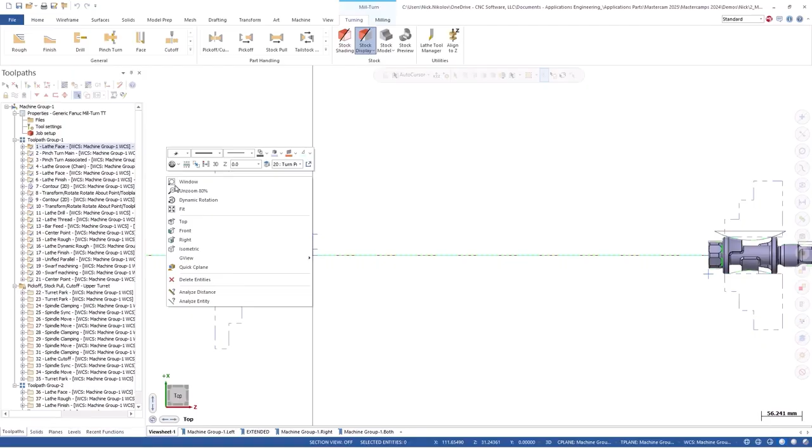Here we can see our fully programmed guide shaft signature part. We already spent a considerable amount of time importing and defining the work holding accurately for both the main and sub spindle. We also took the time to populate the upper and lower turrets in the Tool Setup Manager with all of our cutting tools and locators.

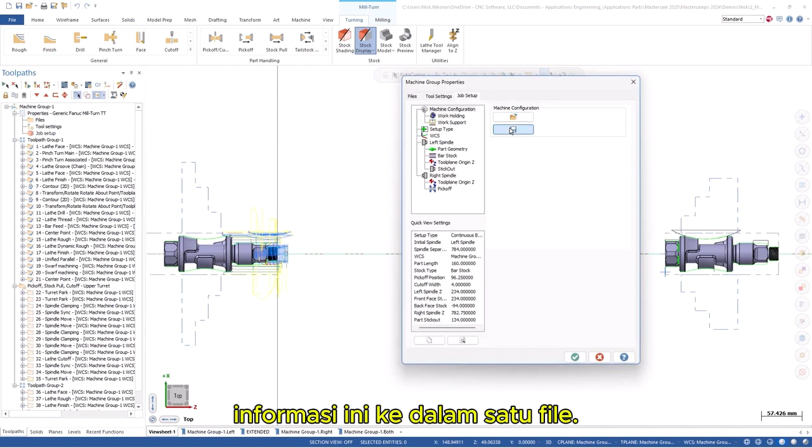Mastercam 2025 now allows us to quickly save out any of this information into one file. We will name the file Guide Shaft and save to our local drive. This file could also be saved to a server location so that multiple users could access it.

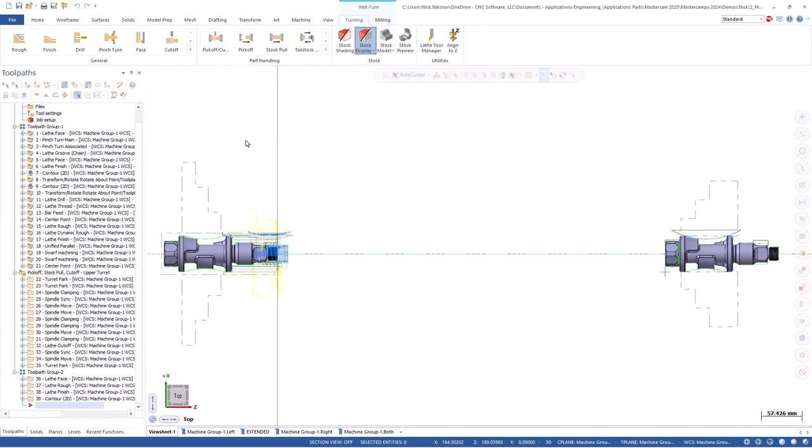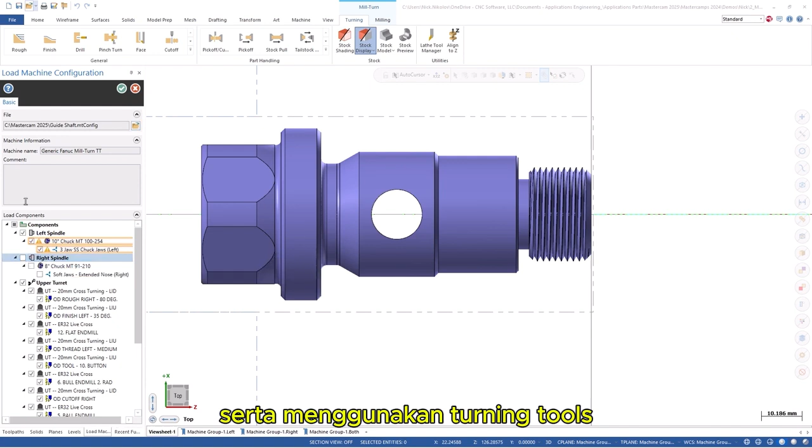We can just as easily load it into our next part file. The Load Machine Configuration button is in the same Machine Group Properties page. In this case, we know that we will be using the same chuck and chuck jaws on the main spindle, as well as using the turning tools on both the upper and lower turrets. We can always come back and add individual tools from this file if we end up needing them later.

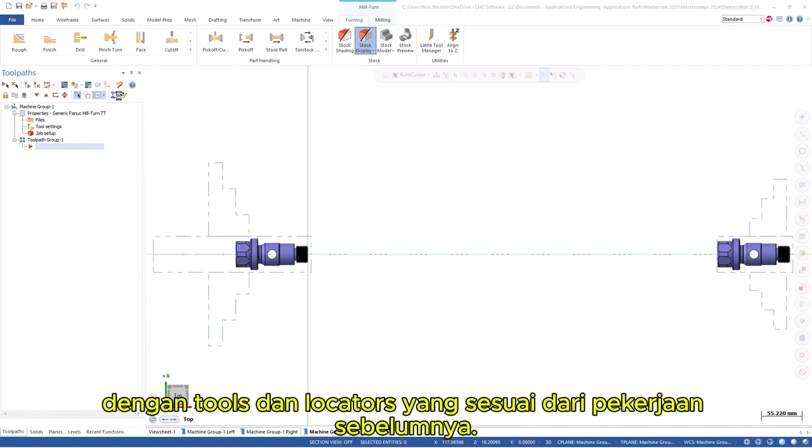We can see that the file has populated our Tool Setup Manager with the tools and locators in their corresponding locations from the previous job. Also, the tools themselves are now available in the tool library. This config file can be stored anywhere on your workstation, but for all the power users out there, you can store it right in the mill-turn's respective .machine file under the Machine Configuration Files node.

Often, a production schedule will be designed around parts that share similar machine setups to reduce downtime. Using Mastercam 2025, we can now program our multitasking turning centers with the same philosophy.